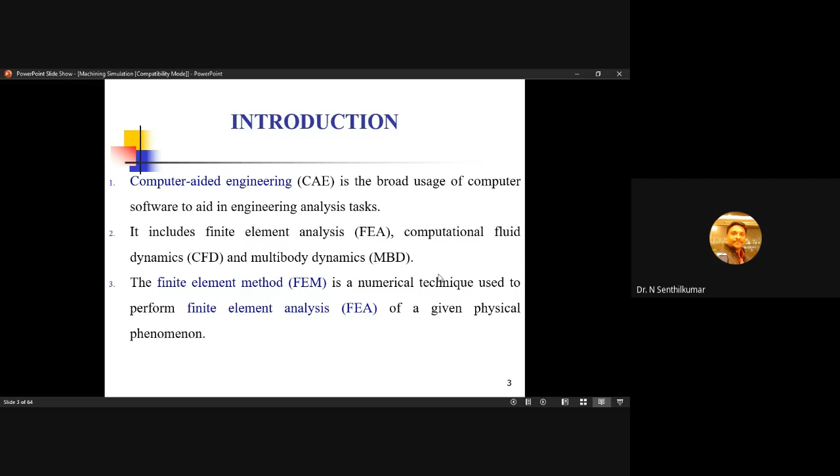Okay. So in finite element analysis, we will be using the finite element methods, in which we are going to discretize the parts into small elements. So the solution for a particular element will be moved towards the solution for the entire domain space. Okay. So in all these FEA, we'll be using partial differential equations.

Because we are going to have FEA in all our studies nowadays, everyone will be aware that the partial differential equation is of that much importance in engineering. That's why there is a separate subject called partial differential equations whenever we go on to a specialization.

So what is meant by modeling and what is meant by simulation? These two are different words. Okay, so a model is nothing but an abstract. You know, if you are going to write a paper, you should write the abstract. That is the essence of a paper. So similarly, the model is only an abstract that is being defined, that is really equivalent to the real conditions.

Right? The real conditions is nothing but we are going to have a product, and that may be having some key properties and characteristics. For example, the material properties, the thermal properties, and also the characteristics, how it is going to perform. Okay, so all that we have to put in a real-time model by using computer systems.

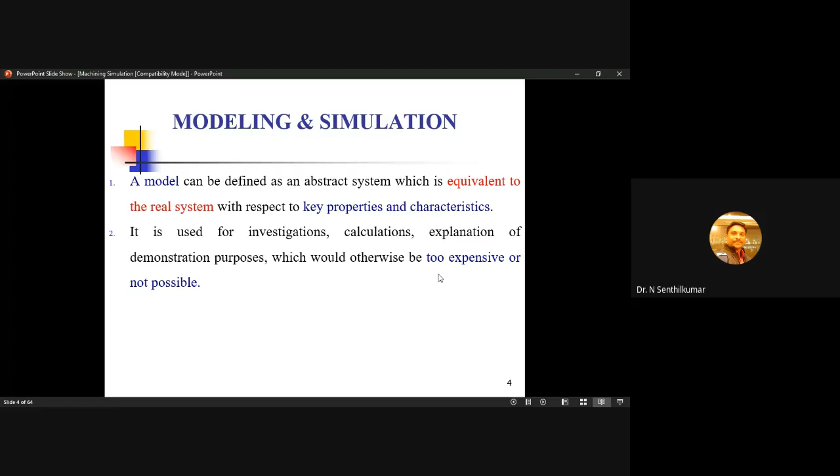If I am going to study these things in realistic conditions, then the expense will be very, very high. And also, in some cases, it is not at all possible. You can see in a turning process, the cutting tool is going to be in contact with the workpiece at a very, very small area. In that place, high shear is going to occur. Will you be able to see that? No, it is not at all possible. So all that we can visualize properly through these simulation studies. So that's why we are going to develop a model.

And also, while developing the model, we are going to provide some general statements, or what is called assumptions. About what type of element we are going to select, whether it is a tetrahedron element, a triangular element, a rectangular element. So likewise, we are going to provide statements about what type of element we are going to take, what kind of structure it is going to have, and how it is going to behave in a real-time system. All these we are going to incorporate into the model.

Okay, so you know the best FEA software is ANSYS. In that also we are going to provide these kinds of statements. For example, whether we are going to carry out the machining simulation in a transient condition or in a steady state condition. We have to determine the values once the machining process has attained the steady state condition. Initially, the steady state conditions will not be attained. So first we have to carry out the simulation in transient conditions, and after some time we convert that into a steady state condition. So two parts will be there: first the transient conditions, and then the steady state condition. So like this, we have to provide the statements, the assumptions, of what we are going to do.

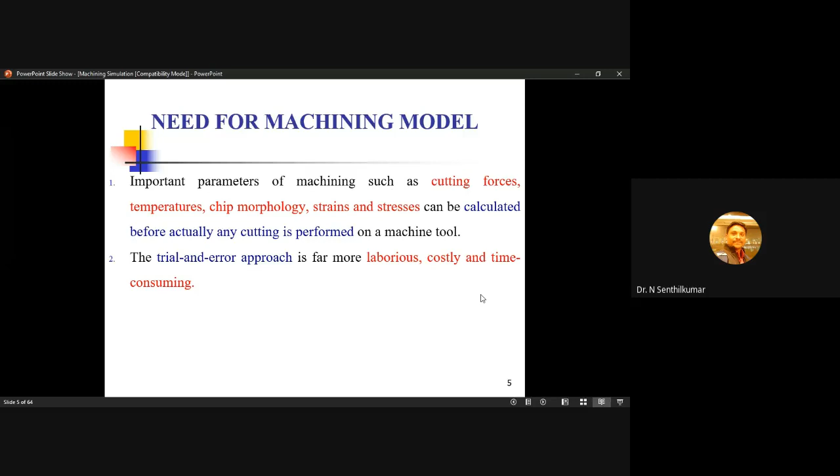That's why in investigational studies, we'll be using different cutting edges for each and every experiment. That's why it is most laborious and also costlier.

Right? So this is the main important thing. With the modeling, that is by using the simulation models, the resources are spared. That is, I am going to prevent the usage of resources: the manpower, the equipment, the electrical power that is going to be used, the cutting tool that is being used, the workpiece material that is going to be used will be spared. And also we are going to obtain an optimum condition.

By using this, we are not going to use anything except the computer, so the cost is also reduced. That's why we are going for these machining models. So what are the benefits that we will be having from the machining model? It drastically reduces the experimental work.

It drastically reduces the experimental work, because if I'm going to do that directly, then I'm not able to reduce the cutting forces and temperatures, because these cutting forces and temperatures will always depend upon the tool material that we are going to use, the workpiece material that we are going to use, and the machining parameters that we are going to select.

If it is a hardened steel, then using an HSS or an uncoated cemented carbide will not fetch you good results. So in those cases, we have to move on to cermet tools or PCD or CBN. Likewise, if I'm going to go for this, then the cutting forces will be really reduced. So this modeling reduces the experimental work.

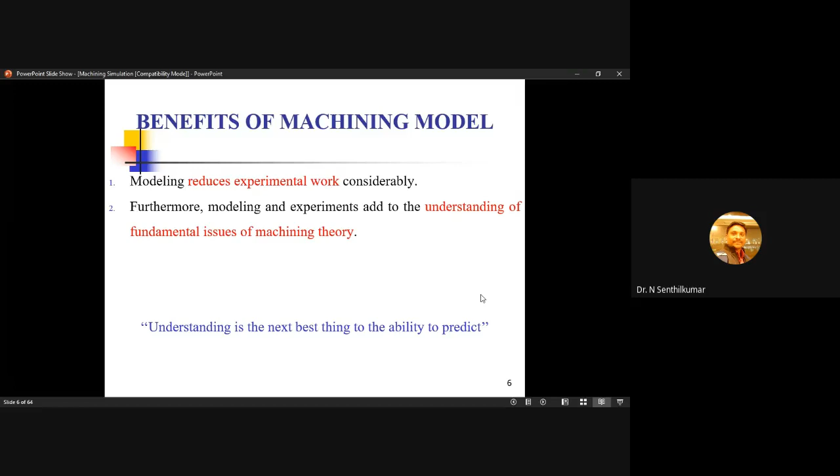So by using the simulation models, it is particularly important, and it is particularly able to help understand the concept in a really good manner, because understanding is the next best thing to the ability to predict. If you understand the basic concepts well, then we are at the edge of predicting things in a really nice manner.

Right. So once we understand the basic concepts, then it acts as a feedback loop for machining research. That is what I was telling in the previous point. Because for research, the understanding of basic concepts is very, very vital, and that is possible with these machining models.

Then, even though it has some advantages, it also has some disadvantages. Sorry, we should not use the word disadvantages, but difficulties. There is no disadvantage of going for any simulation models. It is only the difficulties that we will be facing in the simulation studies. Then what are the difficulties we will be facing? So rather than drawbacks, it is the difficulties.

In doing modeling, if I am going to consider too many variables, then what happens? The complexity of the problem will be higher. What happens when I am going to consider a smaller number of variables? The intention will not be resolved. If I am going to choose a higher number of variables, then the complexity of the problem will be higher. So a trade-off has to be made between these things. That's why the basic understanding of the concept is very, very essential.

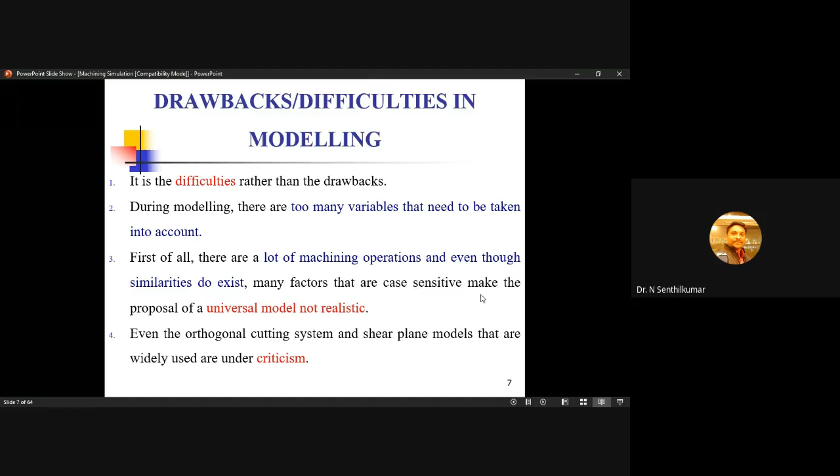So normally we will be going on with the orthogonal cutting process. There are two types of cutting process, oblique and orthogonal. Normally we will be interested in the orthogonal machining process and also shear plane models. But even these two systems are under criticism. Even though we are going to use them, even nowadays they are under criticism. So which is the best model that we are going to find?

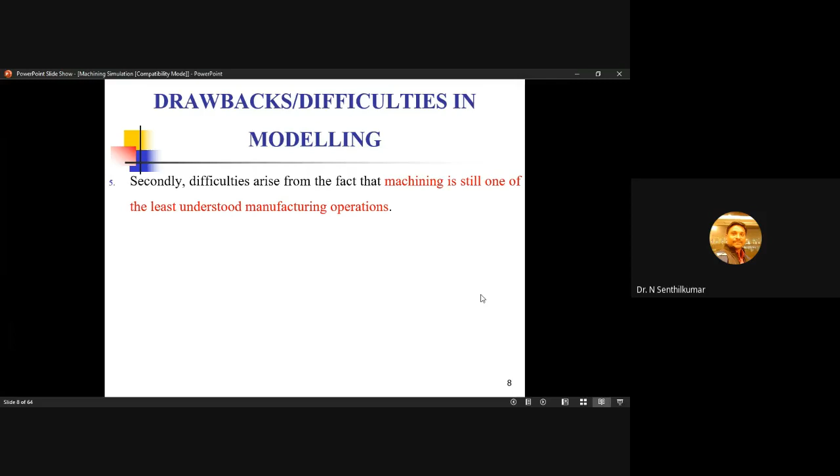Machining is still one of the least understood manufacturing operations. Why? Because how the shearing action takes place, like the Piispanen model we are going to study, is not fully clear. Shearing takes place along the shear zone, like the stack of cards in the Piispanen model. Even though it is least understood, that is one more difficulty.

In turning, the point of the cutting tool touches the workpiece. We have only a small area where the cutting tool is in contact with the workpiece. At that small area, very large strains and stresses act, and only then is the material sheared off. So at that small point, how much stress and strain is going to act is making it very difficult to understand. That is one more difficulty we face.

Then there's the chip forming mechanism. The chip is removed from the workpiece purely through the shearing action of the cutting tool. The chip formation is really complex, and the associated models are also complex. Finally, we can see chip formation models, friction models and so on, which we will study later, because not a single model is universally available.

We have different models, so for your work, we have to select which one is the best suitable. There are different models from which we can select. For our work, which is suitable we have to decide, only by doing the literature review. From studying the previous literature, we can adjust them and understand that.

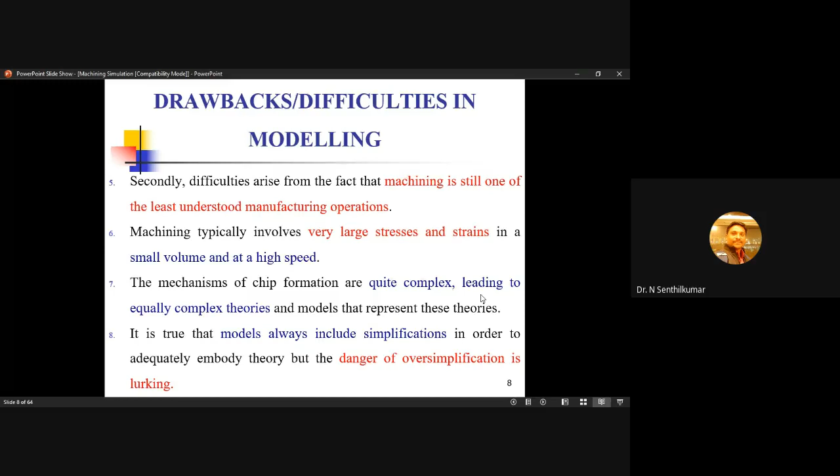If we consider higher assumptions, then the obtained results will be inaccurate. We are not able to predict the real behavior of the system because we have assumed a higher number of conditions. That is one more difficulty we face.

Finally, the properties we provide and the machining parameters we consider make the system more complex. Tool properties include: first, the material; then the rake angle, the relief angle, the nose radius, and the approach angle. That is what we have for tool properties.

Then workpiece: what is the material the workpiece is made up of? Whether it is low carbon steel, high carbon steel, or medium carbon steel, or if it is a composite material, then the complexity will be more. So there's variation in workpieces.

Apart from this, what machining parameters do we consider? Cutting speed, feed rate, depth of cut. We can also consider whether we use cutting fluids or not, whether it is wet machining or dry machining, or MQL minimum quantity lubrication, or cryogenic machining. These parameters increase the complexity of real-time conditions, and we can use these during the simulation process also.

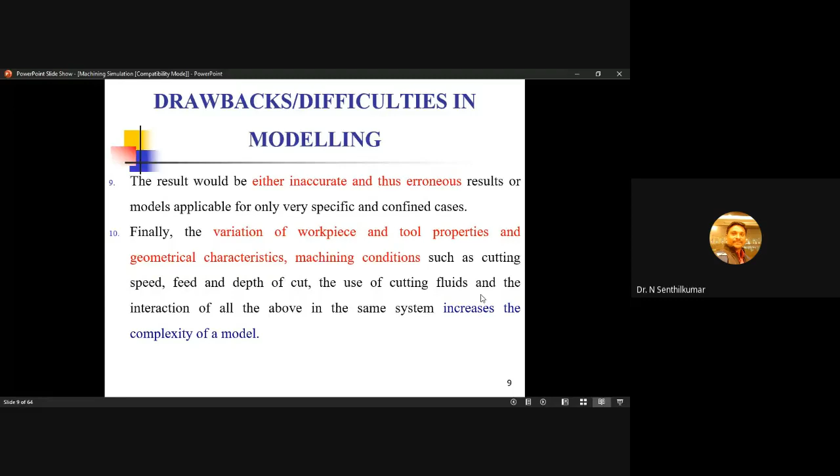Then, how to select a model? The model we develop or select will influence the output responses, so selecting the perfect model for your study is very, very important. What is a model? The workpiece model, the flow stress equation, the friction model, the tool wear model - these are all the models we are speaking about.

So these are the different models. How are we going to select them? Depending upon the model, we can decide whether the output is reliable or not. The selected model will provide a reliable answer to the output. Otherwise, the model we have selected is a pure waste, and the computational time we have waited for is also a waste.

So there are 5 generic categories of modeling techniques available in this case. First is empirical modeling, then analytical modeling, then mechanistic modeling, then numerical modeling, and then artificial intelligence modeling. These are all we are going to have.

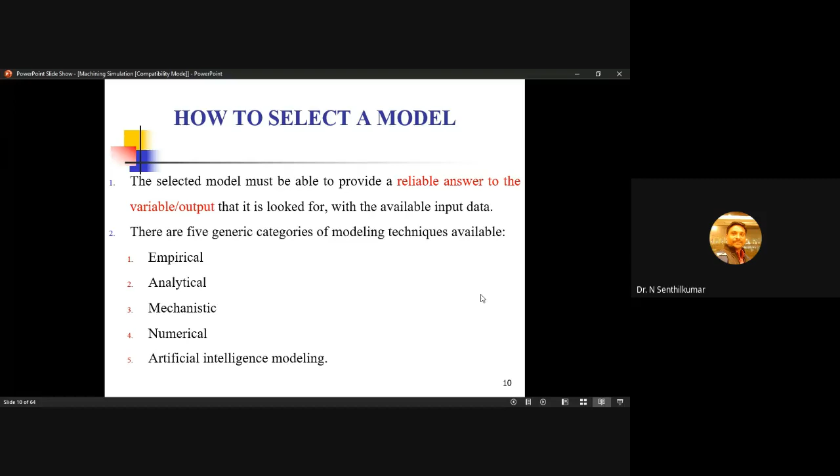Analytical model uses previously developed equations to define the model. The empirical model uses experimental data to build and develop the model. Likewise, different categories have different methods. You all know this very well, so I am skipping this out.

So there are 2 types of models: simple models and complex models. Simple models require a lesser number of input data, whereas complex models require a higher number of input data.

What is the difference between these two? Simple models require less computational time, and complex models require more computational time. The results obtained from the simple model are not that much accurate, but the results from the complex models will be more accurate than those of the simple models.

In the earlier days, in the 1980s or 1975s, while doing simulation studies, tool wear was of utmost importance. So more and more importance was given to tool wear. But nowadays we are going to move on from the tool wear.

Along with tool wear, we are also doing investigations on the cutting forces, the temperatures, and what type of chip is being produced. Also the geometrical accuracies, for example cylindricity, circularity, and the roughness of the machined surface. These are all important things in selecting this model.

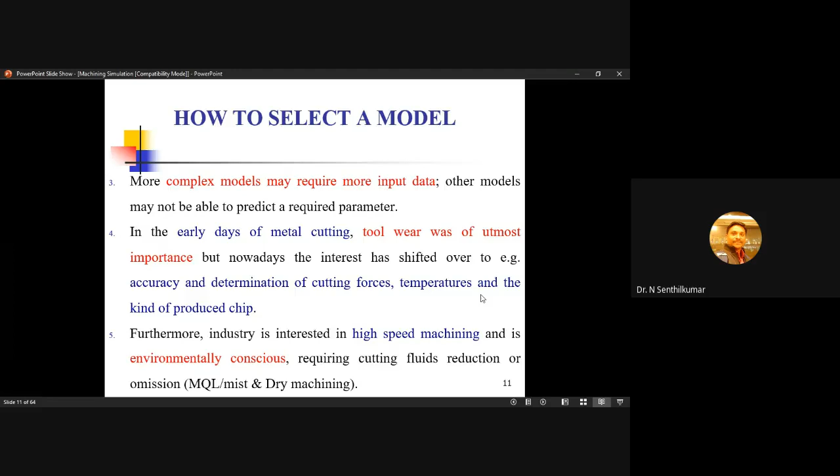So even though you select some specific models for our study, some models will tend to fail. Why will a model fail? That is the first question that arises. A model fails if it doesn't predict accurately—if it doesn't predict the cutting forces accurately, or predict the temperatures accurately.

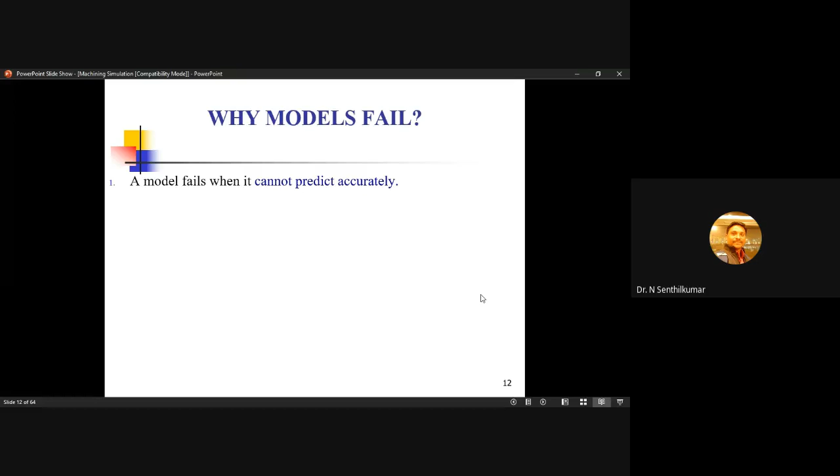This is because the model that we have developed or selected—the flow stress equations, the wear model, or the friction model—if it is not good, then the prediction values will be inaccurate. The models also fail if they are not simple enough.

Previously we discussed the two differences between a simple model and a complex model: a simple model requires less computational time, a complex model requires higher computational time, but complex models are more accurate. However, we require fast results—if a simulation runs for 3 or 4 days, we cannot wait that long. So whatever models we develop should be as simple as possible, so that the computational time will be reduced.

Then, many models fail because of incomplete input data, or omitting some of the critical factors. The most important critical factors in the turning process are cutting speed, feed rate, and depth of cut. If in a study I omit the feed rate, are all the answers obtained correct? No, because we are omitting the critical factor of feed rate. So a model tends to fail if some of the critical input parameters are omitted.

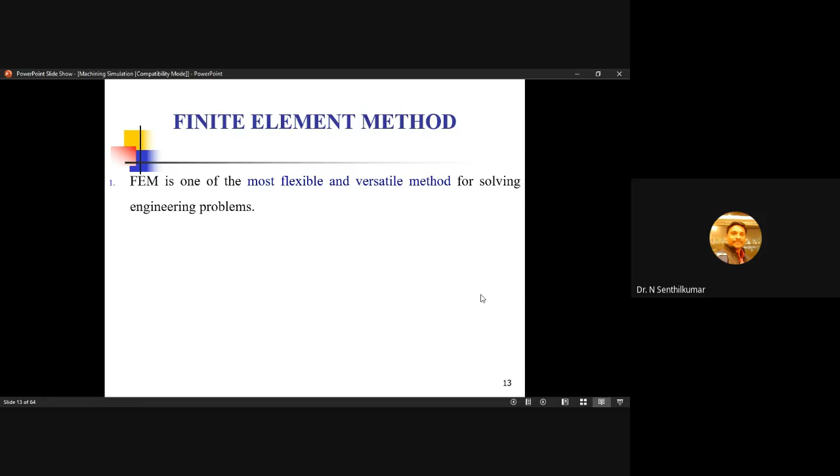Then we move on to the finite element method. It is the most flexible and versatile method. I'll move a little bit fast since everyone knows this concept. The finite element method is made up of small interconnected sub-regions called elements, and the solution is obtained for each element through piecewise approximation, then transferred to the whole domain by integrating.

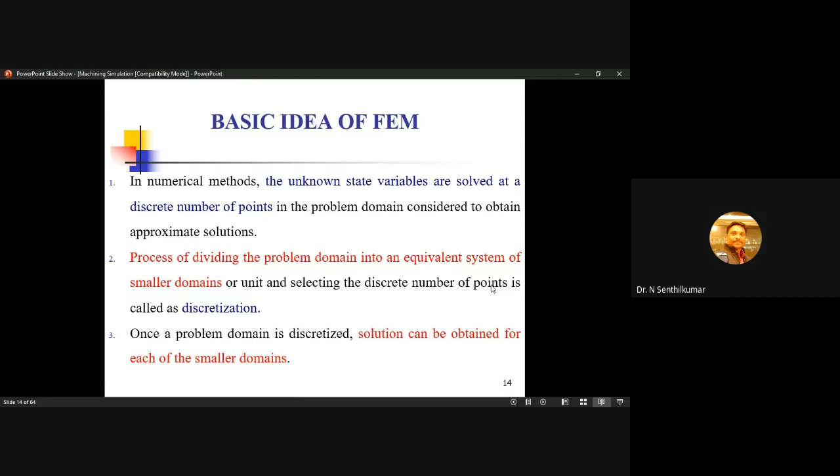...elements. The process of dividing the problem domain into an equivalent system of small domains, so the small elements also represent the solution - that is called discretization. Once the problem domain is discretized, solutions can be obtained for a particular element, and from that element we can get the solution for the entire problem domain. The domain-wise solutions are combined together to obtain the solution for the entire domain.

Elements and nodes put together constitute the mesh. Meshing takes place depending on how it is connected with other elements. The fineness of the mesh increases both the accuracy and the computational time. If the mesh size is higher, the computational time will be less and the accuracy will also be less. If the fineness of the mesh is higher, then there is higher computational time along with more accurate results.

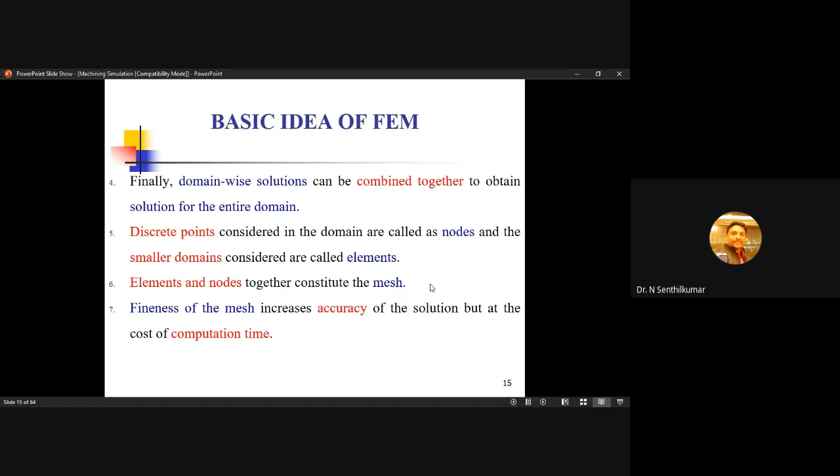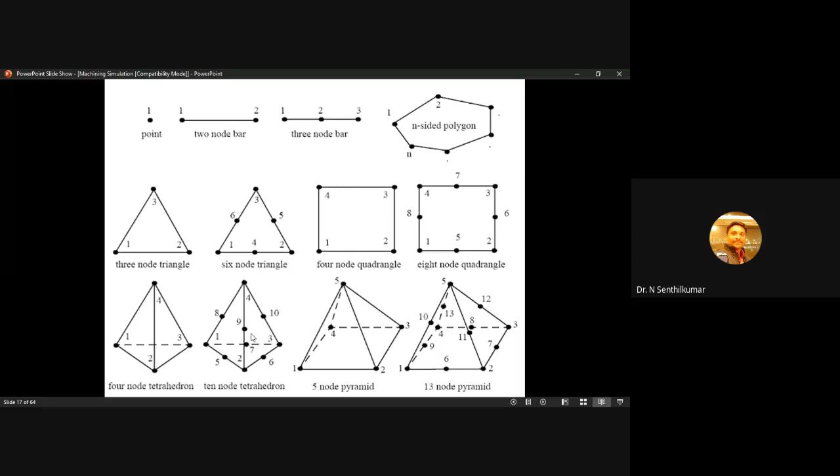Here we can see the elements normally used for 2-dimensional as well as 3-dimensional studies. For 2-dimensional studies we have the triangular element, that is 3-noded or 6-noded, then the quadrangle, and then 8-node quadrangle. Normally for tetrahedron, it depends on the number of nodes - if I increase the nodes, the accuracy level will be higher.

So the computational model using FEM. So now we are entering into the simulation, how we are going to develop it. I'll be moving a little bit fast because the time is very, very less, because the simulation studies will take a minimum of 20 to 30 minutes.

Okay. The first one is modeling, then second is meshing, then specification of material property, and then boundary conditions likewise. So modeling of the geometry, then meshing, then defining the material properties, then boundary conditions, the loading conditions and all we are going to provide.

Right? So the different types of models: the lower and upper bound solutions, then shear plane models, then slip line field models. This we can see in manufacturing technology itself. So what are the different models? What is it going to tell? That we are going to include. Then shear zone models. So these are the 4 models that we are interested in developing a model. Okay.

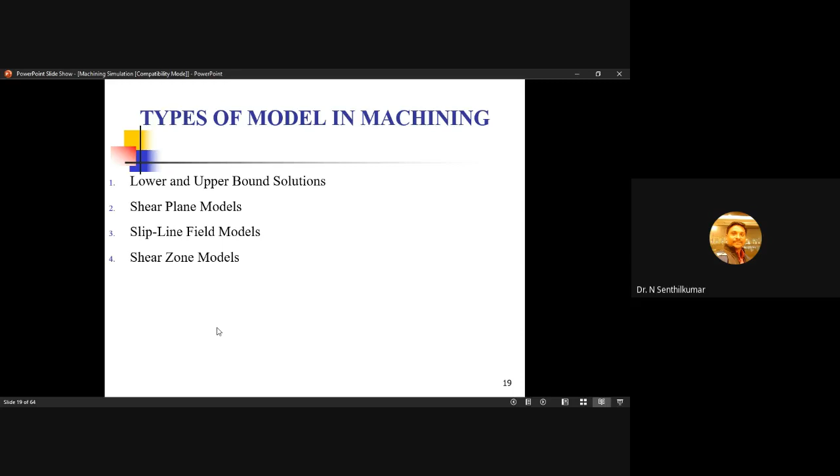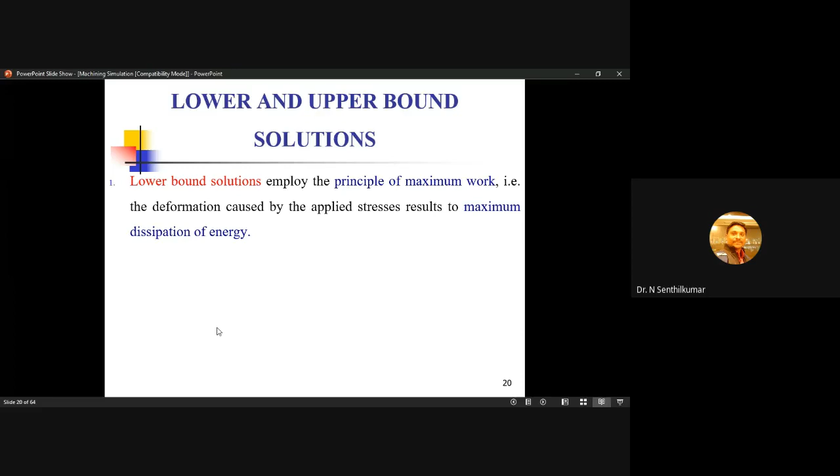So the lower bound solutions employ the principle of maximum work, right? Because once it deforms, it dissipates energy. Deformation is carried out with the dissipation of energy only. Energy can neither be created nor destroyed, but energy gained is equal to energy lost. So the dissipation of energy is subsequent to the next elements. Okay. So this I will move through faster.

So you can see the shear plane model is provided by Ernst and Merchant. In the shear plane model, we are going to have a Piispanen card model, that is a stack of cards, like playing cards. So layer by layer, the metal will be removed along the shear plane, right? These are the things being assumed. The chip is straight. Actually, the chip is not straight, it is curled. But we are going to make it a simple model, so we assume the chip is straight.

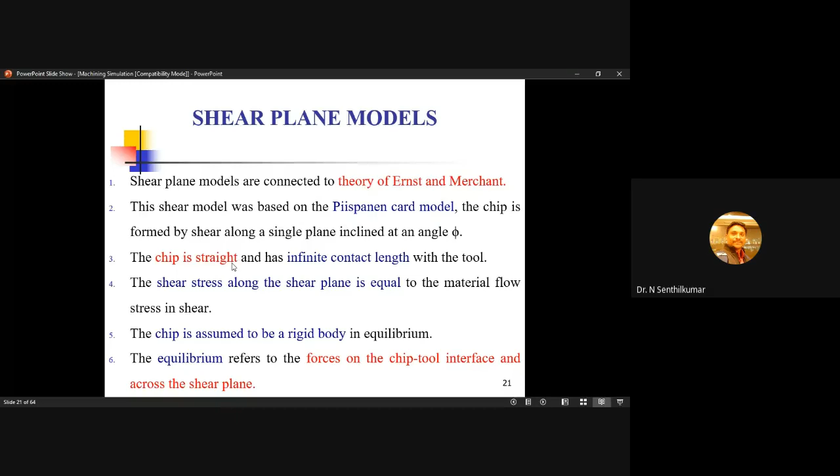And also the chip is assumed to be a rigid body. A rigid body doesn't deform. But that is not the case in a realistic model. Okay. So the equilibrium refers to the forces on the tool-chip interface and across the shear plane. These are some of the assumptions we make in the shear plane models. Then we move on to the slip line field models. Right.

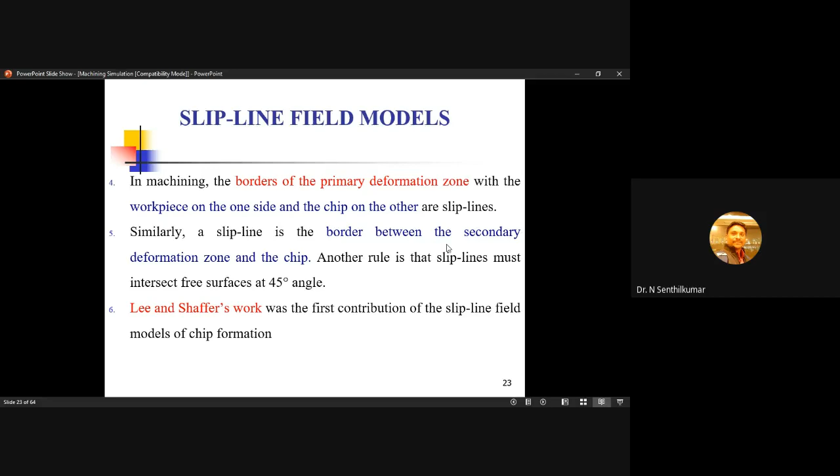So we have two types of deformation zones: the primary deformation zone and the secondary deformation zone. That we will visualize later on. Okay. These slip lines intersect the free surfaces at a 45-degree angle. Lee and Shaffer's work is purely based on slip line fields. So Ernst and Merchant is for shear plane; for slip line, we deal with Lee and Shaffer. Okay.

Then shear zone models. The shear zone model is better than the previous models, that is the shear plane model and the slip line models, because it considers all the features that were neglected or omitted in the previous models. In most of the models, we assume that shear stress on the shear plane is uniform. Actually, it is not. The stresses at the shear plane are not uniform. They vary.

And also we consider that there is no strain hardening. Actually, in all machining processes there will be a little amount of strain hardening. Now there are many excellent papers that predict the strain hardening effect during machining and formability. Right? So the friction among the interfaces is characterized by a friction factor or friction coefficient, mu. So mu is equal to F by N. That also we consider in these shear zone models.

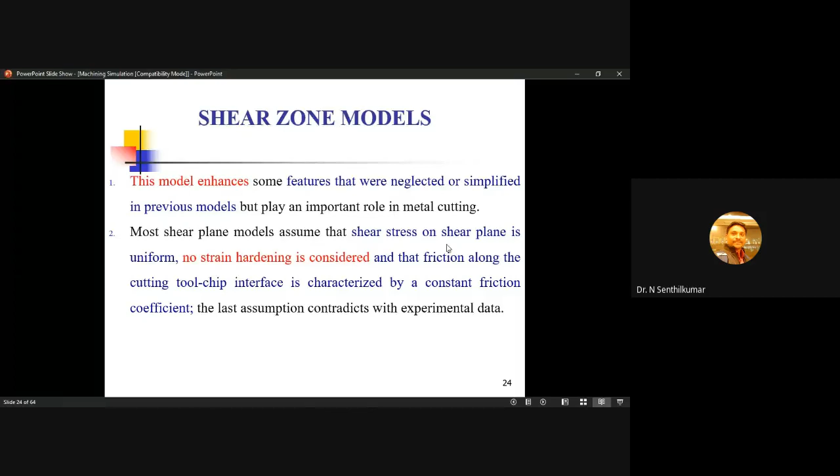But this friction coefficient, the strain hardening, is not being considered in the shear line, shear plane and slip line models. So that's why we are going to consider these shear zone models. Okay. So shear zone models are associated with Oxley.

So I will tell you how to select these types of models while doing the simulation. You can see particularly how this is being selected. You can just select that. So whatever models we require, we can select. Okay, this is all very general.

So for what purpose is this finite element analysis in manufacturing processes being done? The first reason is to validate the results, to determine the performance and effectiveness of the system. So how effective the system is, that we are going to see. Then to identify the optimum conditions, that is, what cutting speed, what feed rate, what depth of cut produces lesser cutting forces and lesser interface temperatures.

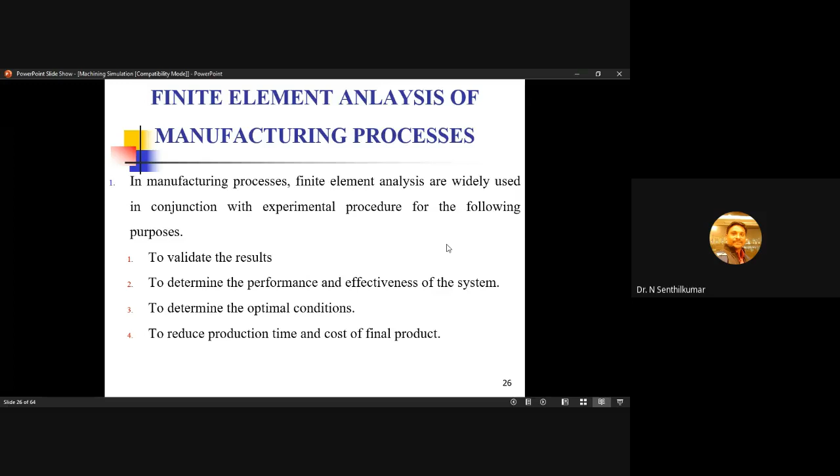Likewise, we are going to decide, and also to reduce the production time and cost of the final product, because most of the simulation studies will assist us in selecting particular input values. So by this, we are going to reduce the manufacturing lead time.

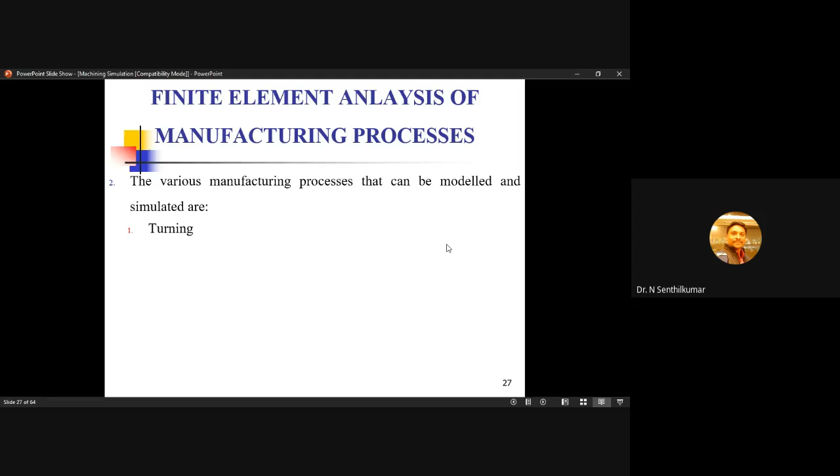So various machining and manufacturing processes that can be modeled are turning, drilling, milling, forming, fluid flows, heat transfer, rolling. These are some of the manufacturing processes that can be simulated. Friction drilling can also be done using software, by using a blunt tool. Okay.

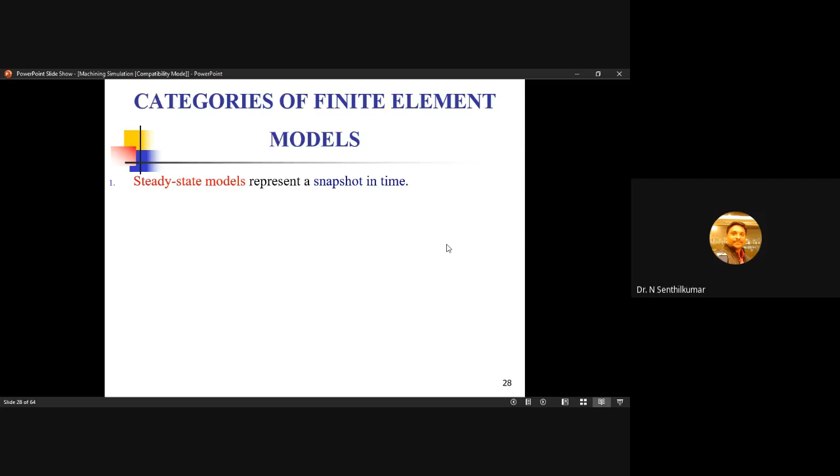So, categories of finite element models. In the first slide itself, I told you there will be two conditions while doing a simulation study. The first one is the transient model, and the second one is the steady state model. The steady state models will be available only after a particular value has been reached. I'll give a small example.

Initially during the machining process, you can see the cutting forces shooting up sharply. After some period of time, it settles down, and that is the steady state condition. The short rising of the cutting forces until it settles is called the transient condition. In transient conditions, the values tend to change with respect to time, whereas in steady state conditions, they don't change. So the steady state models represent a snapshot in time.

The assumed chip shape is used. We will see this in the real-time simulation. Then the shape may be modified. So kindly remember this: the assumed chip shape is used, and the shape may be modified. We are going to do those modifications in our simulation studies.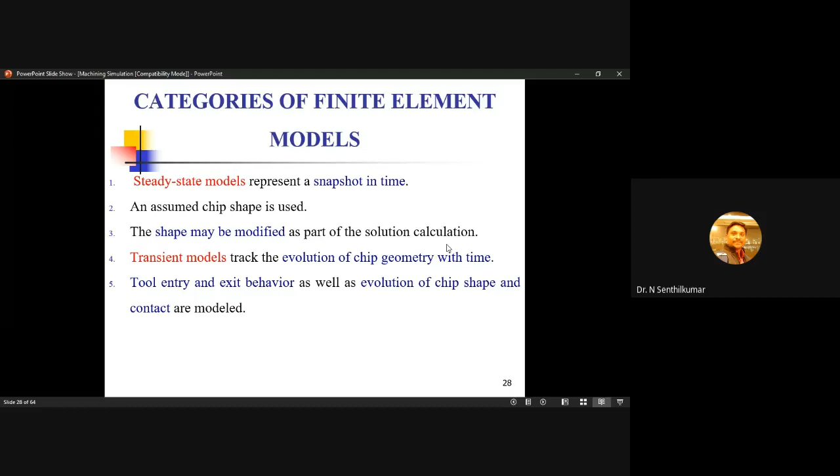Then the transient models. Initially we are going to perform the study using the transient models. It tracks the evolution of chip geometry with respect to time. So with respect to time, everything changes, and that is the transient model. We are going to model the tool entry, the exit behavior, the chip shape, the contact notches, everything. So unsteady chip behavior, because it changes with respect to time.

So in this unsteady chip behavior, we'll be having frequent remeshing. Why does remeshing occur? Because material will be removed. And adaptive remeshing, kindly take note of this word. In ANSYS we will be doing the meshing, and the meshing is adaptive. It automatically remeshes once a new surface is formed, and that is called adaptive remeshing.

Reaching steady state tool temperature is not practical without a special treatment. So what is that special treatment? We are going to remove some material from the chip and give a special shape to the chip. Only then can we convert this transient condition into a steady state condition.

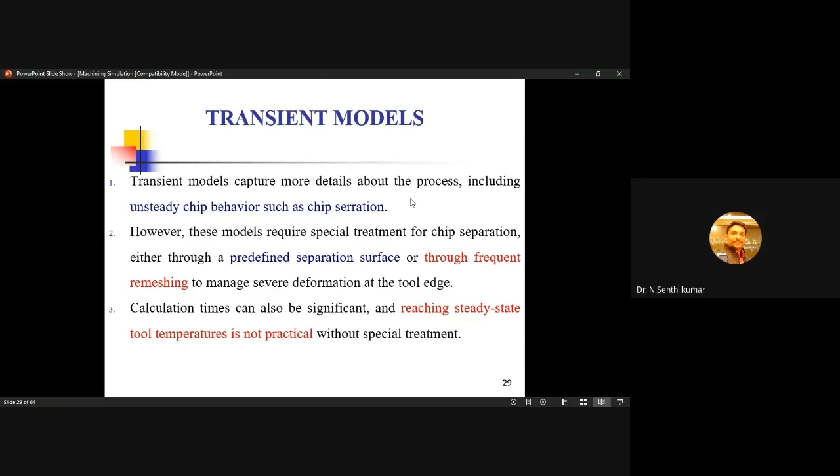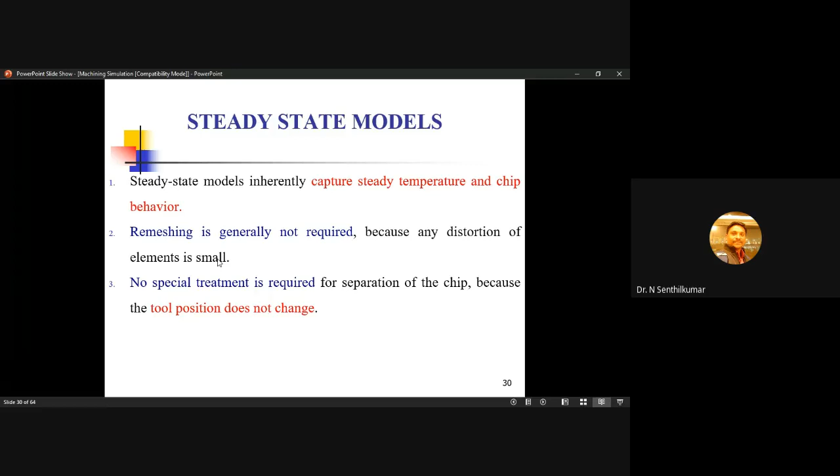So it captures the steady temperature and chip behavior, which doesn't change with respect to time. Remeshing is not required, because once we have attained steady state conditions, even though new surfaces are generated, the same values will be obtained. Frequent remeshing is not applied because the distortion of elements will be less in this category. No special treatment is required, because the tool position does not change. We'll see all this. Then we come to 2D versus 3D models.

So the 2D models are appropriate for orthogonal cutting simulations. Okay, so it can use only orthogonal. So while comparing with the 3D models, the 2D models' computational time will be very, very less, but the accuracy of the results will also be less. For example, this 2D simulation can be done within 1 hour, whereas the 3D simulations can take 8 to 9 hours maximum, with a moderate meshing and element size. If I'm going with a further fine meshing, then it will be nearing 12 to 13 hours.

So the 2D models are appropriate for studies to study the fundamental behavior of the machining process. If I want to study the fundamental behavior, then I can go with the 2D models. So how the residual stresses and how the microstructural changes are going to take place, all that we can visualize clearly using these 2D models.

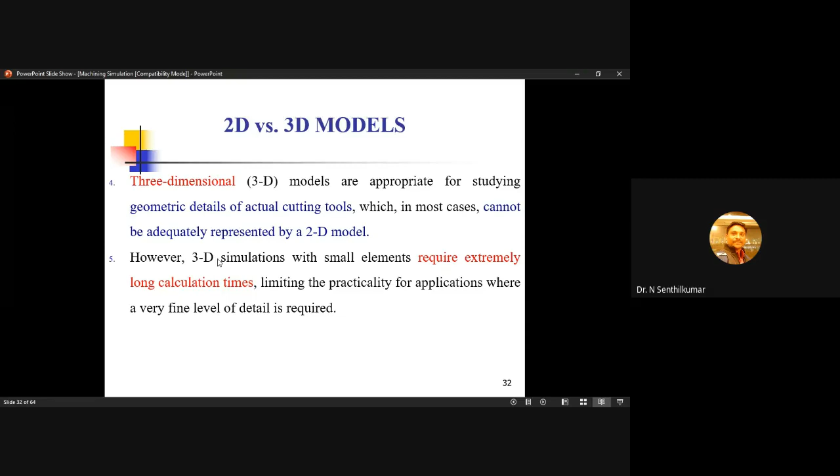So the 3D models are appropriate for studying the geometrical details of actual cutting tools. So how this cutting tool is going to wear, what type of wear is there, all that we can easily visualize by using these 3D models, right? Because tool wear cannot be easily seen in the 2D models. Only in 3D models can it be easily visualized. But these 3D models require extremely high calculation times. So that is the most important drawback of going with these 3D models.

So historic developments I will skip, because it's already time. It's already 10:50. I will rush a little bit.

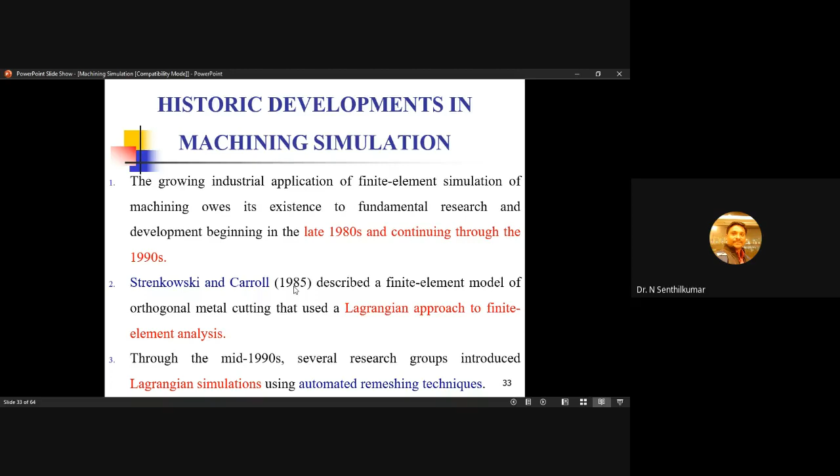So it all started in the 1980s. Strenkowski and Carroll defined the Lagrangian approach in the year 1985. So simulation studies have been done for only about 35 years. Then automated remeshing techniques were introduced along with the Lagrangian simulations. Then Sekhon and Chenot used automated remeshing with the code Forge 2, developed at a French research institute. Then Camacho, Marusich and Ortiz introduced continuous remeshing techniques in 1993. So most of the developments in simulation studies have taken place after the 1990s, for high-speed machining.

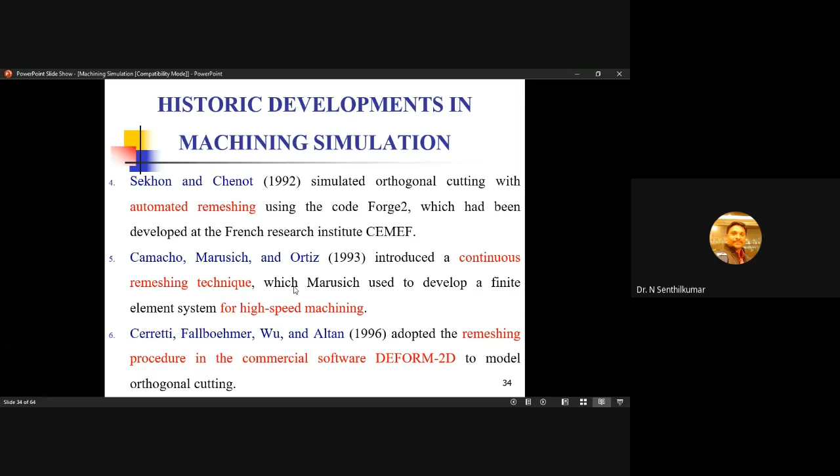So the first DEFORM 2D model was introduced in the year 1996. Cerretti, Fallboehmer, Wu, and Altan adopted the remeshing procedure in the commercial software DEFORM 2D. DEFORM 3D is also available; these two come in the same package. Then in 1997 we have the Eulerian model. Then 2D simulations, then 3D. So 3D was introduced in the year 2000; before that it was only two-dimensional. In 2000 the turning process in 3D was first carried out using commercial software with adaptive remeshing. So this I will skip. Right. This is very, very important.

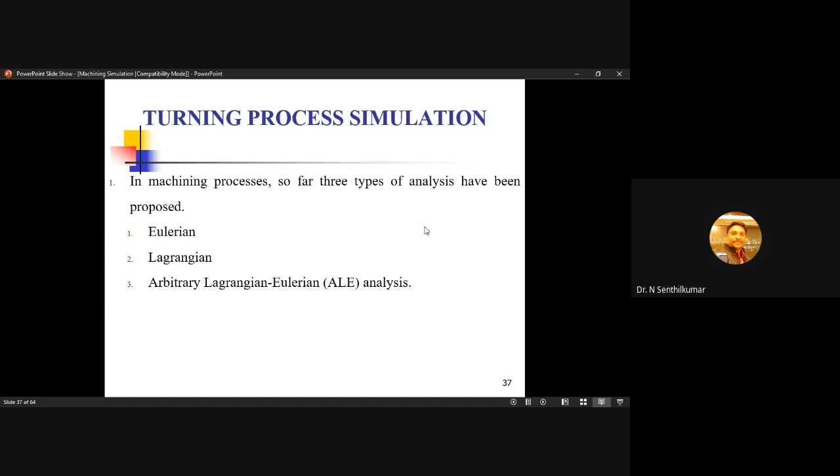So in the machining process, normally we consider Eulerian, Lagrangian, and arbitrary Lagrangian Eulerian. Considering the advantages of both Eulerian and Lagrangian, we are going to use ALE analysis. And normally we go with ALE only, because that is the best approach we have nowadays. Okay, so this I will skip because of the time limitations.

The meshing. So the initial mesh is very, very significant for the results. There are two types of meshes available. One is fine mesh and the other one is coarse mesh. Coarse mesh is used for testing, whereas a finer mesh is used for checking the model. So coarse mesh for testing, and for validation a finer mesh will be used, right?

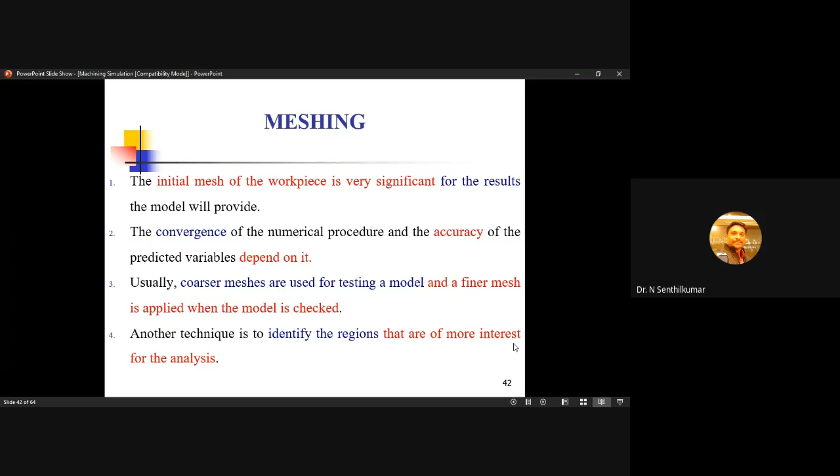And the most important thing is we are able to identify regions that are more important during the simulation studies. So which area is very, very important in a turning process? The place where the cutting tool and the workpiece meet. In those places, we are going to have a finer mesh. As we move away, we are going to have a coarse mesh. That is one of the beauties of these commercial softwares. At the point of contact, we have finer mesh; once we move away from that, we have coarser meshes. Okay.

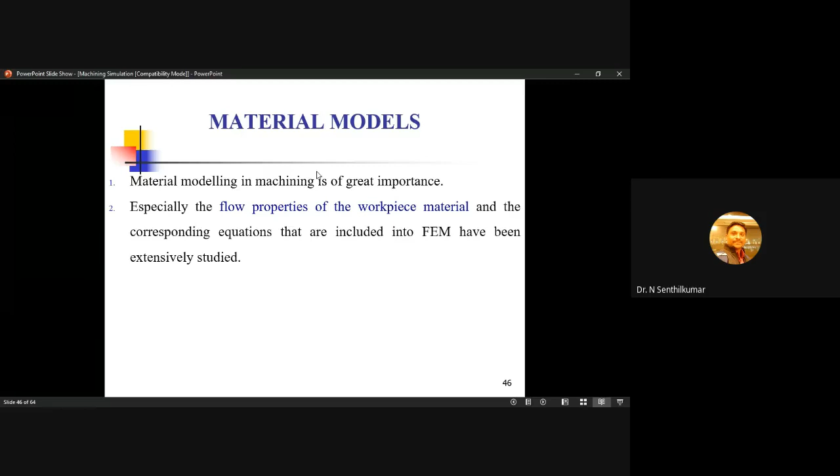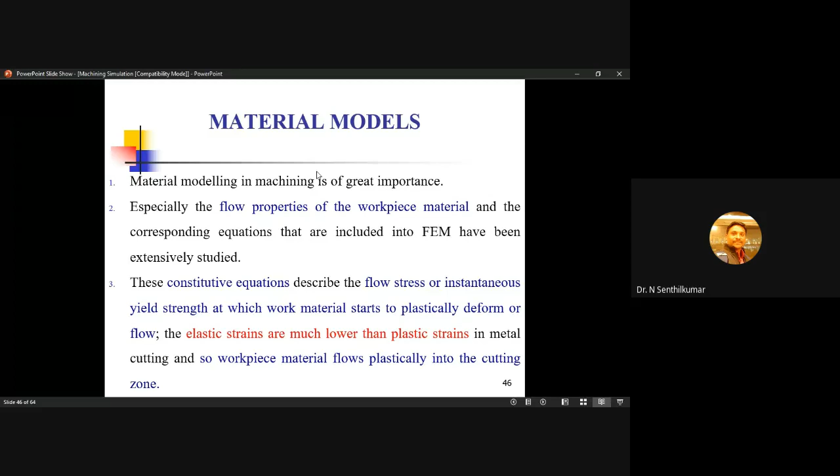So material model. The material model is purely based on the flow stress equations, how the material flows, the flow properties of the workpiece material. The flow is nothing but how it is going to behave in elastic and in plastic conditions. It all depends on the yield strength of the material. So that flow stress is very, very important.

Based on that, we are going to have elastic plastic, elastic viscoplastic, rigid plastic, rigid viscoplastic, like this. We have two different zones, primary zone and the secondary zone. In the primary zone, the temperature will be around 150 to 250 degrees centigrade, and in the secondary deformation zone, the temperature will be around 800 to 1200 degrees centigrade. And also the strains will be very high strains.

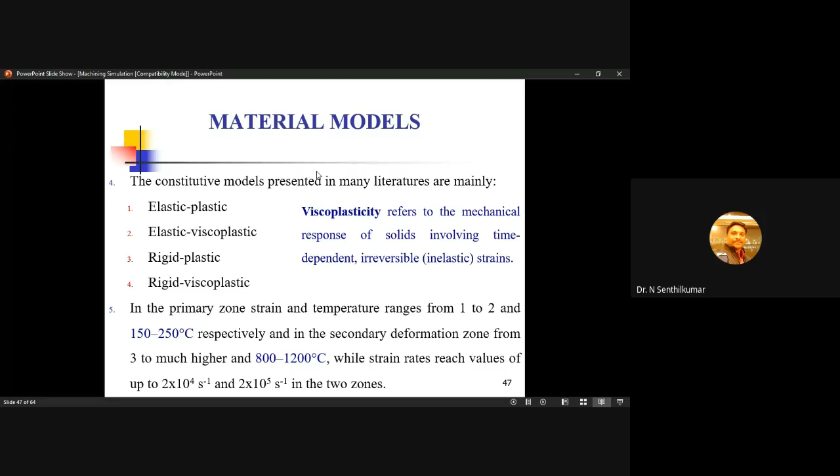So what is viscoplastic? The mechanical response of solids that involves time-dependent irreversible strains, that is called as viscoplastic. These are the different models you can select during the simulation: Usui model, Oxley model, Johnson-Cook model, Zerilli-Armstrong model. Normally we will be selecting the Oxley model and Johnson-Cook model. I will tell you how to select that.

Then flow stress measurement. How are we going to measure the flow stress? Only from the tensile test we can define this flow stress, but that is also an approximate one. Why? Because larger strains are going to occur, and that is not possible with the real-time tensile test. The traditional tensile test involves measurement of the force.

In normal conditions of machining, the strain rates at the primary zone are going to be 10 power 5 or 10 power 6. But in the real-time tensile or compression test, we are going to have only 10 power 2. Where is 10 power 5 and where is 10 power 2? If the metal properties are already given in the software, it is easier for you. But if I want to define a new material, then these flow stress equations have to be provided, and these values can be obtained only from the tensile test.

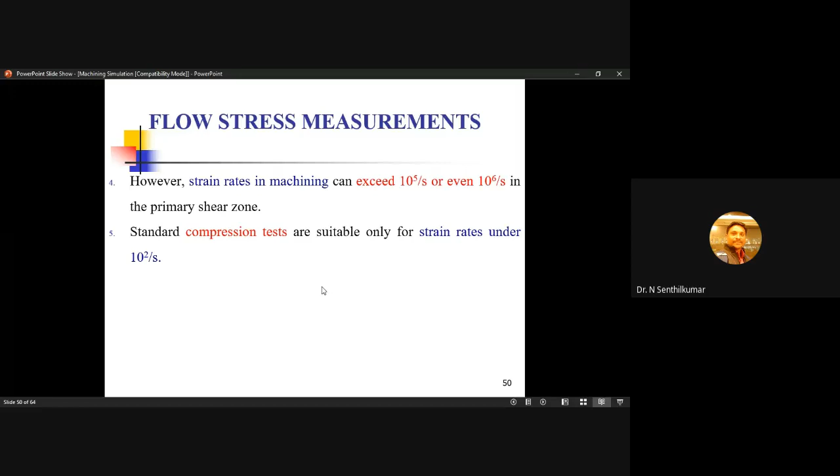The strain rates we obtain from the compression or tensile test will be around 10 power 2, but that's a vast difference. So in those cases, we go with a high-speed tensile or compression test. Even then, instead of 10 power 2, which is 100, we can only increase to 450 per second. 10 power 5 is 1 lakh. So 450 versus 1 lakh, you can see that much difference. That's why the flow stress equation we enter has to suit the real workpiece condition.

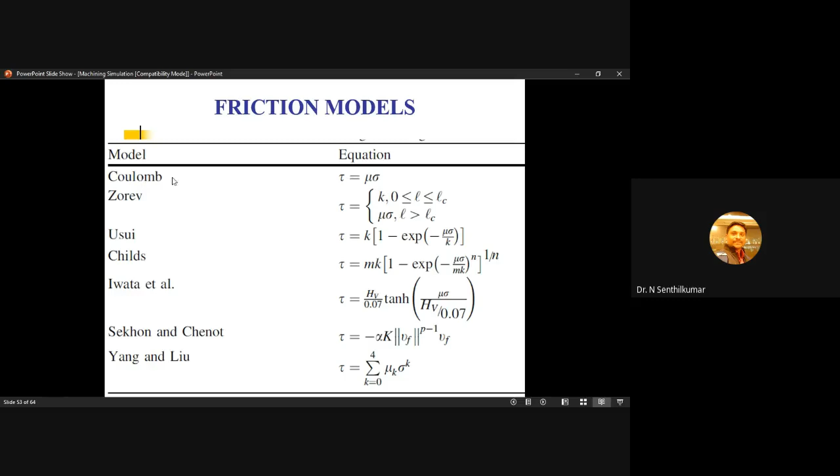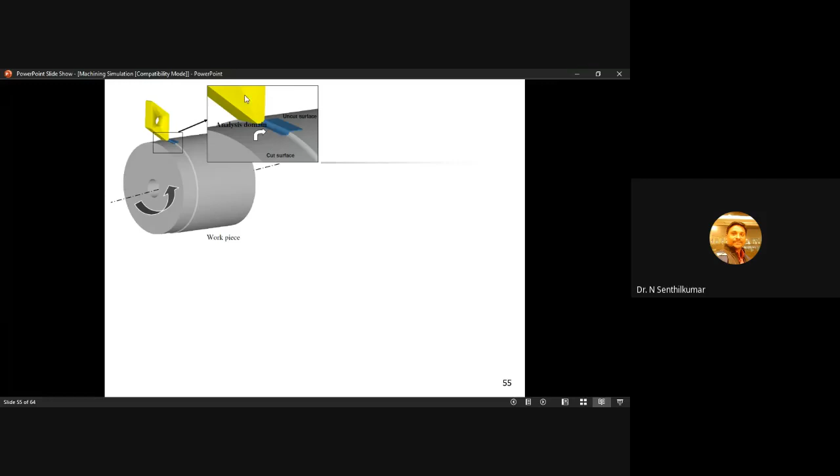So as you all know, the cutting tool will be in contact with the workpiece at a single point. So that point alone we are going to take for our material modeling. So at this place we are going to remove material. So this is for 2D. So we are going to be interested in this. Then we have the 2D simulation.

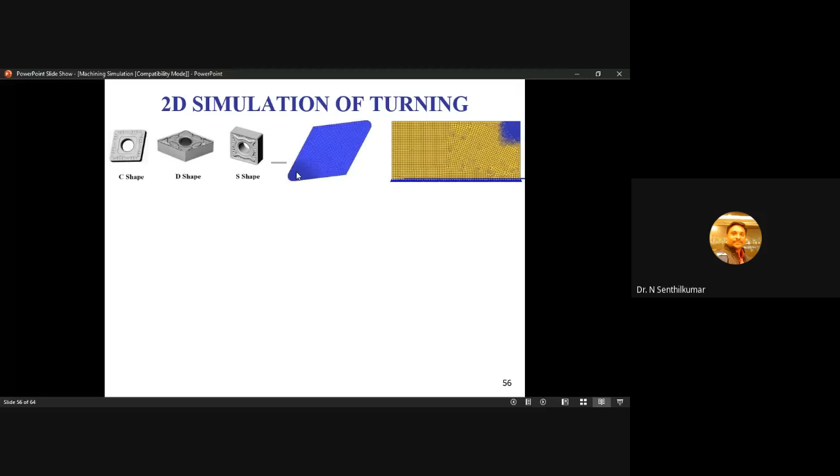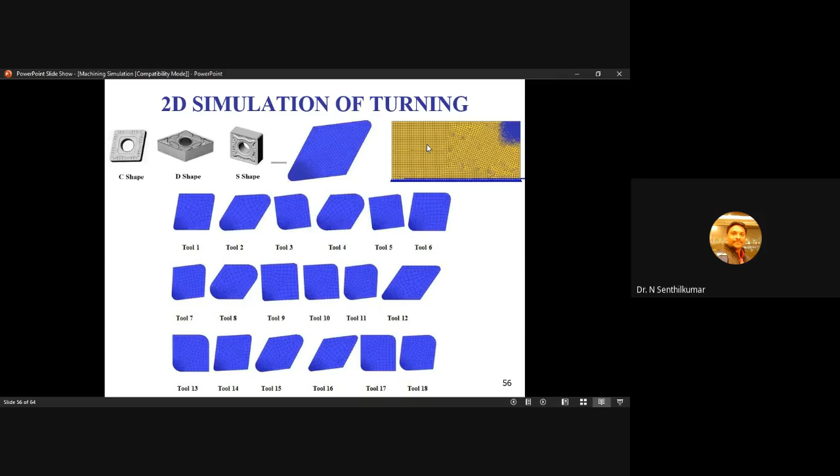We have different shapes. So this is a D shape. So here you can see, this is the place where the cutting tool and the workpiece are going to meet. So this is made finer. Here also you can see this is made finer so that this place and this place will be in contact. Apart from this, we have coarse mesh. So these are the different tools that we have modeled for our studies. And this is the simulation that is being carried out.

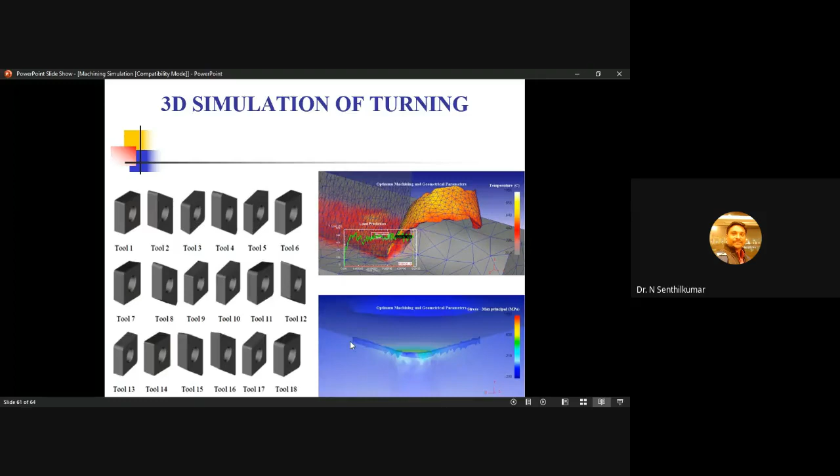So this is how the cutting forces or maximum principal stresses are going to act at the cutting edges and the places that surround and support the cutting edge. From this we can also determine the effect of different cutting speeds on contact temperature, how the contact temperature changes by changing the cutting speed, and we can see the mean stresses. So you can see here, it rises drastically, and after some period of time it is going to stabilize.

If you have any doubts in this, you can ask me now. Or if you don't have any doubts, we will move on to the simulation studies.

Yes, sir. I have a query regarding this material model. Yes, sir, tell me. Normally, for material modeling, we use the Oxley and Johnson-Cook material models, and you are talking about FEM modeling. So which one is better of these two? Which should we choose? Normally, in comparison with Oxley, they will be using only the Johnson-Cook, JC model, sir. Yeah, of course, sir.

Johnson-Cook model is the one we can use, and in most of the research articles also you can see that Johnson-Cook model only, because that provides better results than the Oxley model.

So now I'm asking the difference between this FEM modeling and Johnson-Cook modeling. Which one is better if you can tell me that? It all depends upon the number of factors that we will be considering, sir.

Right, here you can see Oxley, it's a very simple model. But here you can see the parameters, how many parameters it considers - temperatures, strain hardening coefficients, stress values, it all considers that. So that's why when compared to the Oxley model, this Johnson-Cook model is totally different. You can go and find the variations.

Actually, Johnson-Cook is the modification of this Oxley model, right? Yes, sir. That's why I'm asking, in between Johnson-Cook and your FEM, which one is better if we do this modeling? Johnson-Cook is better, sir.

Thank you. Any other doubts to be clarified? Sir, this is Gopi Vel. Sir, how to ensure that whether our given meshing is right?

How to verify? So that's why we are told two things. For the first time, if I'm going to do initial studies, then I have to go with the coarse one. For validation, we have to go with the finer mesh. We should have a trade-off, sir.

Because if I'm going to decrease the meshing size, then the computational time will also be higher, but the accuracy of results will be higher. So that is not needed in the initial cases.

Once we can see that this is the cutting speed, feed rate, depth of cut that I'm going to use, then I can use different meshing sizes and I can find out the variation, and the best results can be used.

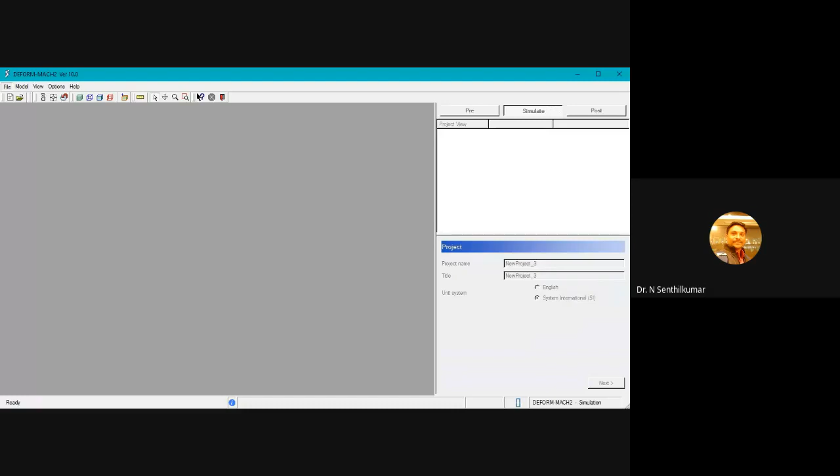New project. So for the new project, I will give it as AMET, the name of the institution which is performing this FDP, AMET. So the title, trial. There are two unit systems. Normally we will use the SI unit, System International, so I am selecting that. Then next.

Then operation 1. Here you can see machining transient. Now there is a drop down menu. Even though I put it here, no drop down is visible, because the drop down will be activated only when a certain amount of chip is produced. So keep it in mind. The transition to steady state is possible only when a certain amount of chip is available during the study. So initially it will be only transient.

Then next, surface speed in meter per minute or rotational speed, you can give both. Rotational speed is n. Surface speed v is equal to pi dn by 60 or pi dn by 1000, depending upon the unit. So I'm going to select this and I can give any values. Also you can use the same value.

So next, the environmental temperature. Whether we are going with hot machining, normal machining, or cryogenic machining, you can change this temperature. Now the ambient temperature is 30 in our country, so I'm going to put it as 30. These work interfaces and all, just keep it as it is.

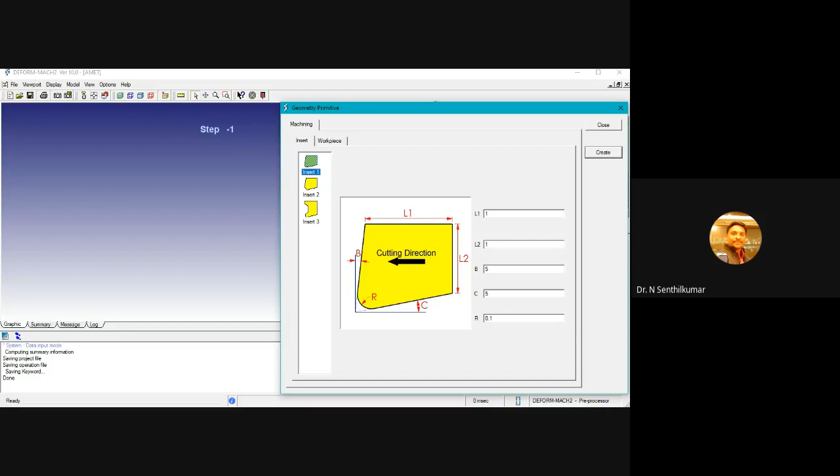So this is the cutting tool. This is a portion. There are 3 different cutting tools available, but I am sticking with the normal carbide. So here I am going to put it as create. Here you can see, a tool has been created.

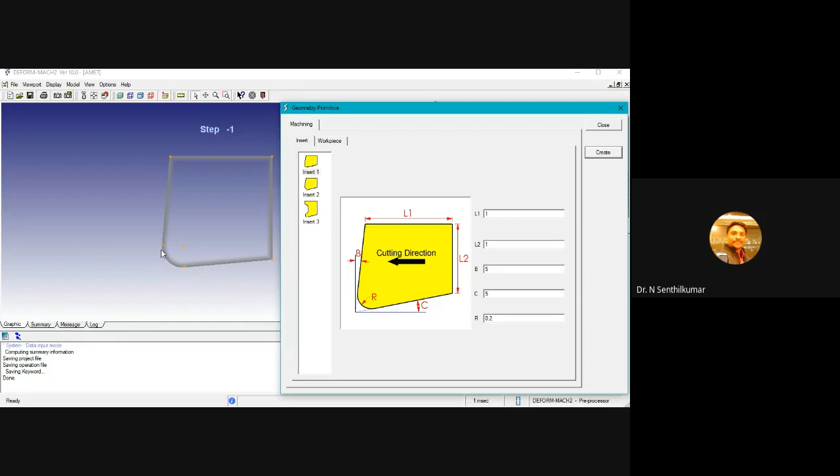Now if I change my values, what happens? Now I am going to change the nose radius to 0.4. You can see it has been changed now. So I am going with 0.2. My nose radius I have set at 0.2. Create, close. So I have defined and developed my material tool model.

Then next, whether we want to provide any coating, because tools may also be coated and their effects can also be studied. In this case, there is no coating. So next.

How much mesh size am I going to provide? Someone asked, some professor, whether we want to go with coarser or finer. In this case, I am going with coarser because I am going to study how it behaves. So I am going with the least thing, 100. Then I am going to generate the mesh.

So here itself you can see the place of contact of the tool with the workpiece. It is being done in a finer mesh, and away from that it is a coarse mesh. Have you seen that? This is the difference in meshing, because in these places I am giving least importance. So here only I am interested.

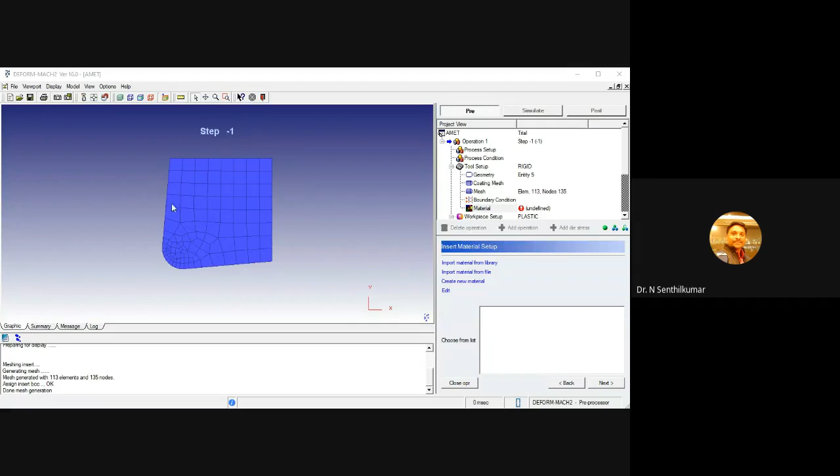And next, then insert a material setup. What is the material for this? I am going to import material. So this is the tool. Then for this I am going to assign the material as tungsten carbide. So my material is tungsten carbide. Tool material is tungsten carbide.

Then next, the workpiece is also a plastic. So the temperature is ambient temperature 30.

Then next, here also I am going to define the primitive geometry. Here also you can see directly we can change it. So now I am going to change it to 2. You can leave it as it is also. So first I will leave it as it is. Here you can see, now I am going to change the value to 2. You can see the change. So whatever is your requirement, you can change.

Then next, what is the size? The number of elements through uncut chip thickness. This is the depth of cut. I am going with less depth of cut, so I can go with a higher or moderate depth of cut of 25. Okay, now I am going to generate the mesh.

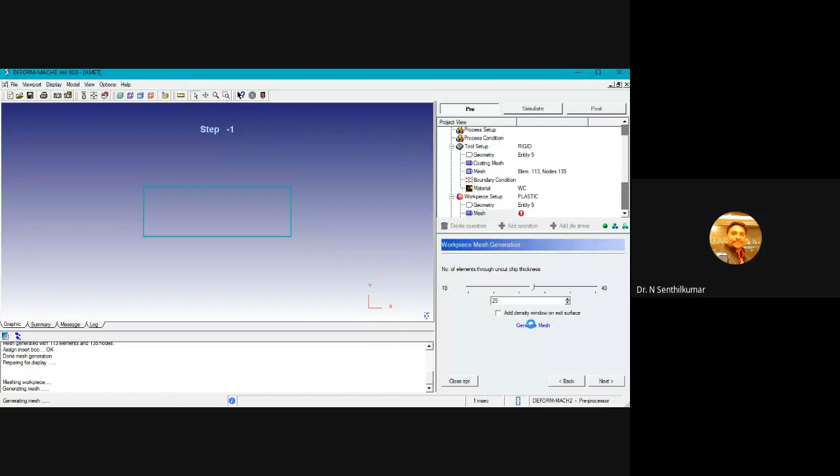So this is the depth of cut, the number of elements through uncut chip thickness. Here you can see a finer mesh is being developed at the point where the cutting tool will be in contact. The remaining places it is going to be bigger.

Next, workpiece material. What is the workpiece material? Now I am going to import, or I can create a new material. Someone has asked the material name. I am going to give a name. Define elastic properties. Yes, next.

So flow stress equations - someone is asking about this. What is the flow stress equation? This is the Oxley, this is the Johnson Cook, whatever it is. Now you can select this. The strain rate, strain from the tensile test we can provide, so that it will take the material property. Okay, now I'm going to cancel this.

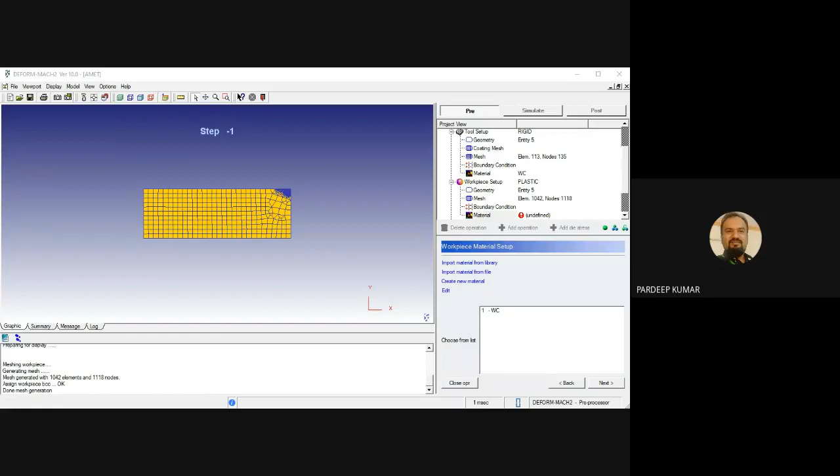Sir, your presentation is not working, I think. For the next model, is it not working? Yes, yes, yeah, the full thing I have to provide, I think so. Wait a second, wait a minute. Now it is popping out, sir. Whether this is visible? Material, yes sir. Window is visible, sir, visible. Yeah, please sir, carry on.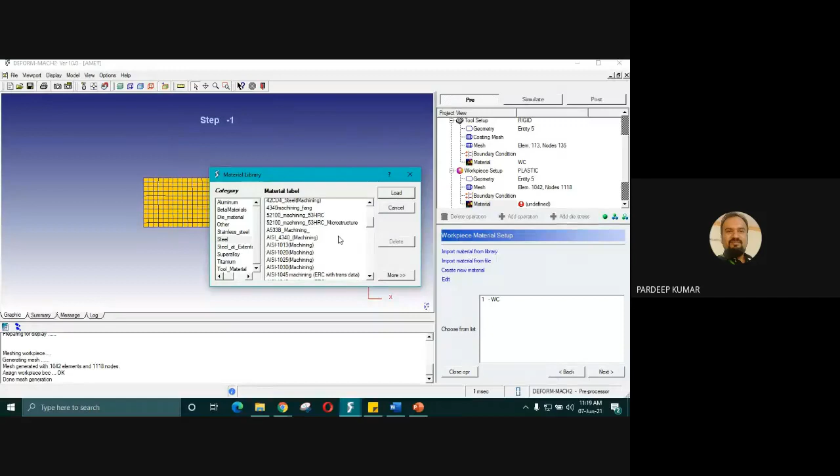But now I am going to stay with the library, so here it is the steel. Sir, may I stop, may I ask something? Yes, yes. Sir, as you say that on the basis of tensile stress results, first we'll have to experimentally do something to find this out, yes sir. Okay, for composite only, because here also we can have composite. I will tell you some composites, sir. Correct sir, correct, please carry on. One second.

Stainless steel, superalloy, titanium, tool materials, aluminum also you can see. Beta materials. So no composites there.

So for this workpiece material, I am going with steel. In steel 1045, you can see the ERC with the trans data. What type of data is this? I have to check with more. You can see the flow stress, the material, austenite material. Look at the strain rate, the temperature, Young's modulus, everything is being given here, and the thermal properties can also be given.

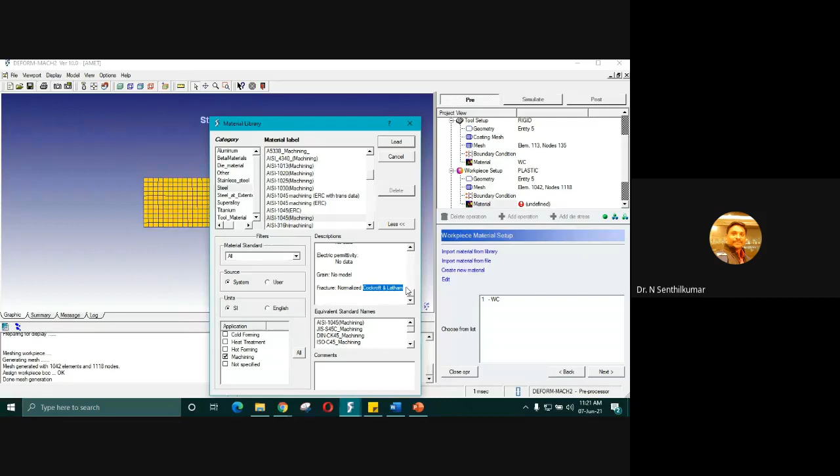I'm going with the next one. Here you can see the J.C., the Johnson Cook model, metal flow model, then 1045 ERC, you can see. 1045, you can see. Fracture model is also there.

Here you can see the Oxley equation. So which model we require, that can be selected. Now I'm going to load this. So the flow stress equation that I have selected is Oxley. If I want to select Johnson Cook, then I have to go with the ERC data. ERC is a company name.

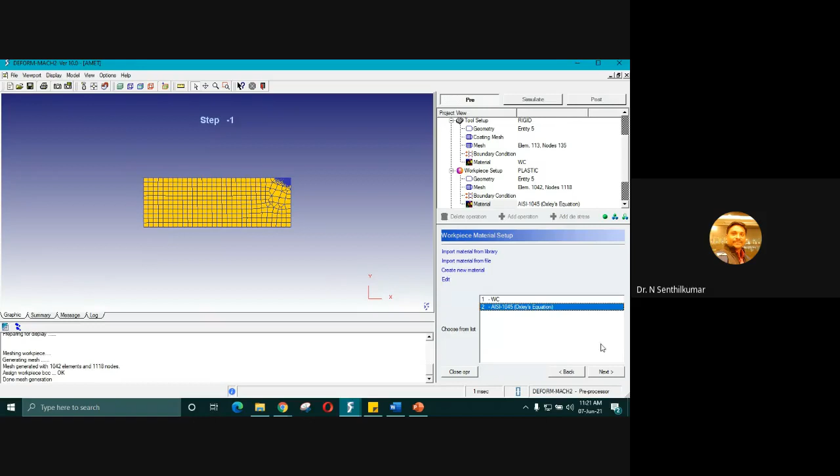Next, then you have to position that, no? So generate default position - by default it will be positioned. The problem will be with the 3D only, 3D only we have to manually position. That is very, very difficult at the initial time. Once you learn it faster, then it is very, very easier.

Then next, so Usui tool-wear model. From literature survey you can study for this material what the parameter values for Usui tool-wear are. This is the equation, so A and B only we have to provide. Next, number of simulation steps, I am going to limit it to 100, and number of increments to save, 5 increments to save. Length of cut, whether I want full or any off, I am going with off.

Next. So status is ready. Check data. Once we check data, you can see on the lower left corner something will be running, and finally the database can be generated in blue. Once this blue is available, then only I have to click generate database, right? Now there is no red. In the left bottom, you can see done writing database. So next, do you want to close current operation?

Yes. Then simulate. There are 3 tabs now: pre-processing, simulation, and post-processing. In simulate, run simulation. The simulation has been submitted. The simulation graphics also you can simultaneously see.

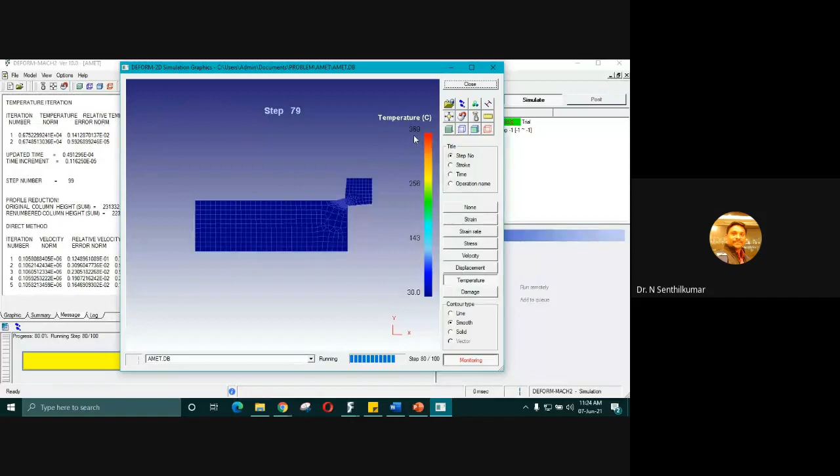You can see step number 57, the temperature. What is the temperature here now? Is it visible? The temperature is 261. You can see 57 steps was completed. 80 steps completed. So what is my temperature here? 369.

Clear? Right, now the simulation has stopped. Why has it been stopped? Simulation is completed and stopped at the user specified time step. I have provided only 100 steps, so it has stopped. Okay, now consider this one.

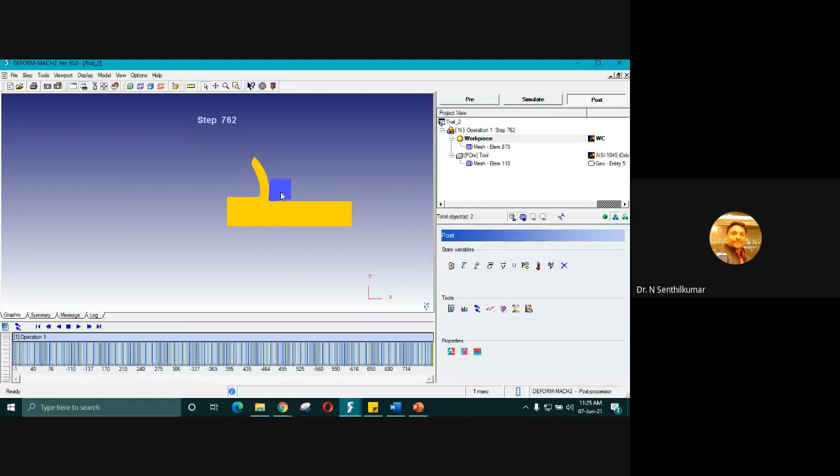I have done some previous study and now I am going to load that, because it will take some time. I don't want to take your valuable time. So this is the case. So at the final you have seen that. Here there is a problem because I have changed the material. Instead of tool material, I have given it as a workpiece material, so temperature will not change.

Here, the state variables, you can see what is the temperature, then what is the deformation. So this is the temperature and this is the deformation, that what you have studied.

Okay, this is the case. Now we have completed the transient conditions. We should not take the values. So kindly accept, we should not take the values. Then what we have to do? Once again I have to go back to pre. I have to select some values before. So totally it is going to be 750, I think so.

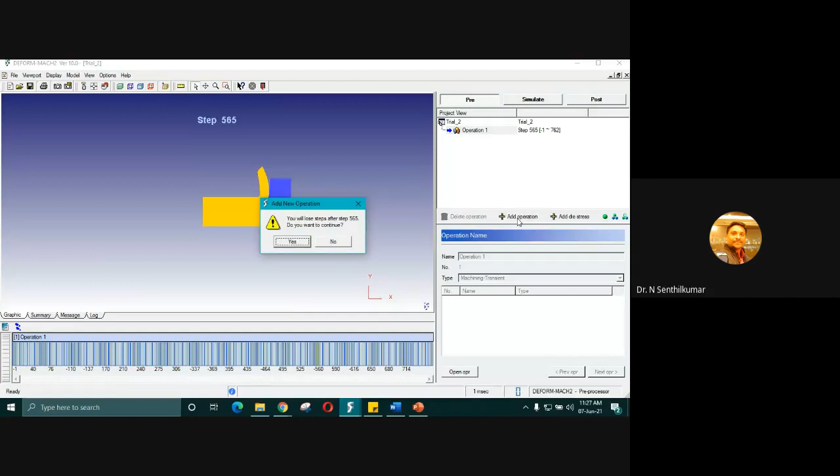That is, once a pre-quantity of a chip is being produced, this will be converted into steady state. Now I am going to do this machining in steady state. Open the operation. Okay, now it is in the steady state. Next, you can see the tool has gone. Why? Because previously I have told, for steady state condition, the chip shape has to be changed. Some modifications have to be made.

Now I am going to select this to this. Okay, sorry. So this is the selector. Now from start to end. So these nodes I have selected. Why am I going to select? I am going to remove this so that a free surface is developed. So that's why I'm going to convert the transient into steady state.

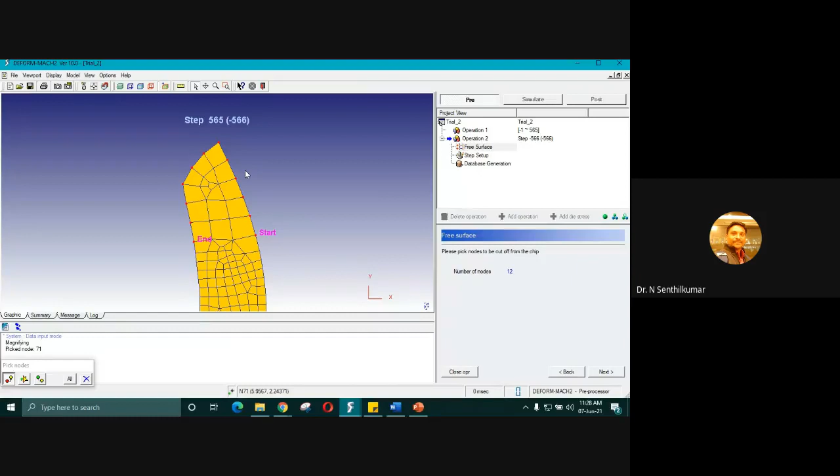You can tell me one important thing. What happens when I select from start? Okay, so I'm going to cancel. Now I'm going to select from start to start. What happens? You can see everything is being selected. Why? Because this is the place where it comes through the tool.

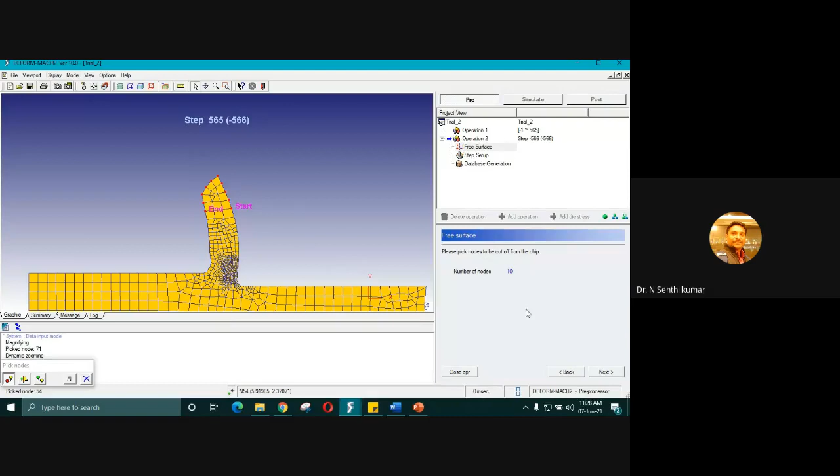So it has to be only from this side. So from shear to here. So this piece I am going to remove. You can see the number of nodes is 10. Next. So that will be removed now. You can see that it is being removed. Now I am going with the 10 simulation steps.

Next. Check database. On the left side you can see database can be generated. Generate database. Done writing database. Still now there is no problem at all. Next. Do you want to close the current operation? Yes. Then open the simulation. Now run the simulation in the steady state conditions until the steady state is reached. There will be some problems.

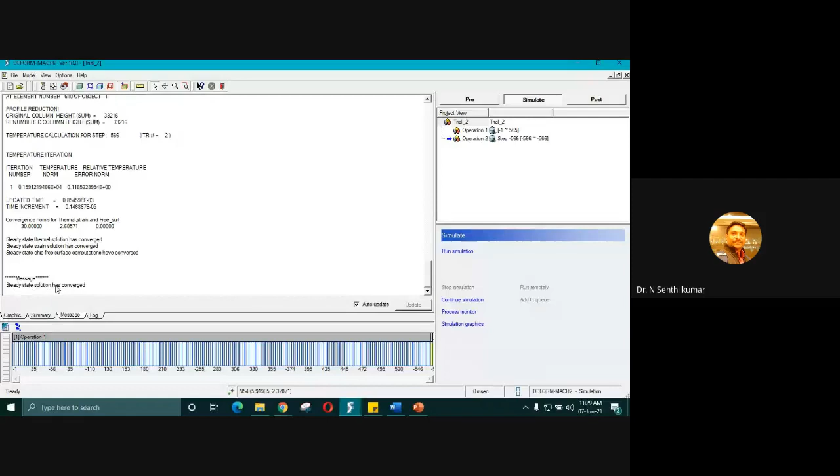Here you can see steady state solution has converged. Within one step, the steady state has been converged. Then post. Now look into the temperatures. Because as I previously told, because I interchanged the material, the temperature is not coming. Okay.

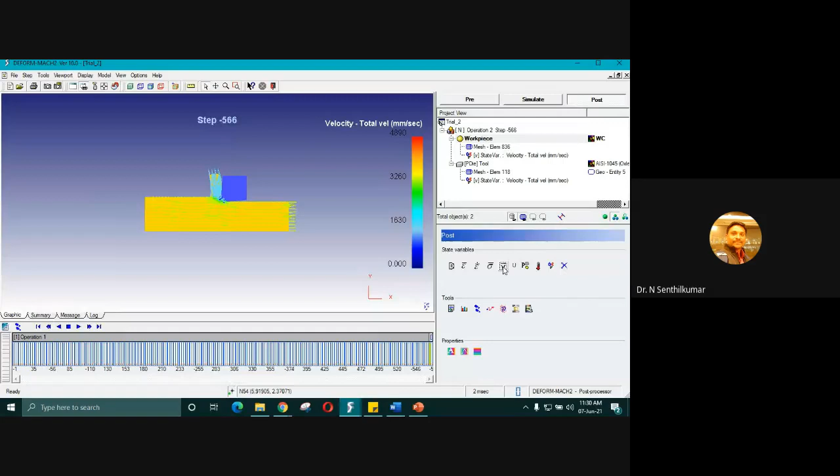This is the temperature. This is the pressure, you can see. So I can go with the local or whatever it is. Then this is the displacement, the velocity, this is the effective stress, effective strain rate, effective strain, damage, whatever it is.

Okay. Now I want to determine the cutting forces. How to do that? So now the steady state has been reached. Now I want to determine the cutting forces. Kindly be with me for the next 5 minutes. I will finish it as early as possible. Now, 1 second, I am going back to pre.

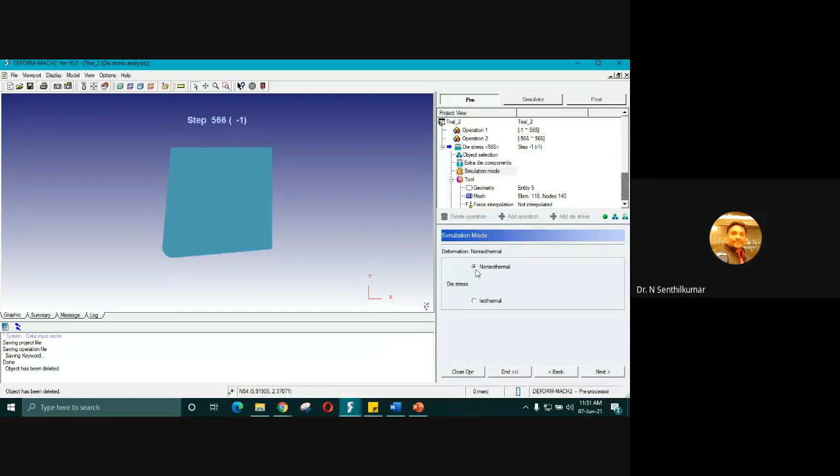Okay. So after steady state is reached, now in the pre-processing you can see add die stress. Add die stress. So die stress. Next the material. Next number of the extra die components. There is no extra die components. Next, die stress is isothermal. Next, next, next. Click just next. Now interpolate forces. That's all. The forces have been interpolated from the workpiece to the die.

In the workpiece, the force in the x direction is 0.0043 newtons, and here also the same case in the die. Fy also the same thing. Okay. So this is how you are going to interpolate the forces. So cutting forces can be interpolated. The interface temperature can be interpolated. The pressure, the strain rates, whatever it is, we can interpolate from these studies. So this is all about this.

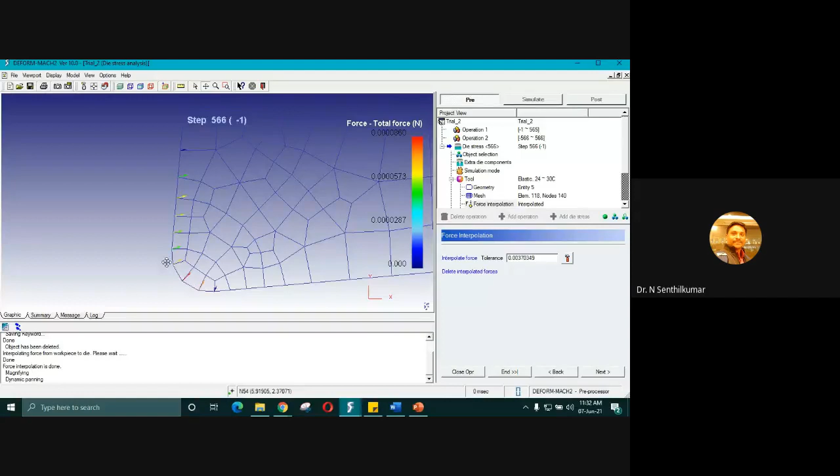So here you can see how the cutting forces are going to act. Red color is higher, no? So higher cutting forces are acting exactly at the contact point. As we move away, the cutting forces are lesser. During that, the chip is going to slide over the rake face, no? Here the cutting force is also higher. But here you can see, this is the place which is not going to be in contact. So the cutting force is less here. So higher, then it reduces. Do you have any doubt in this?

Good morning, sir. I'm Ram Gopal Reddy. Good morning, sir. Tell me, sir.

So, is there any criteria to choose the type of model, sir? So, different models produce different results, sir. First one thing. Okay, that's why for AISI 1045 itself, we have both the Oxley model and Johnson-Cook model. Right? So the behavior of the material, because there are variations in material itself, batch to batch variation, within piece variation, piece to piece variations, we call it. No two materials will be the same.

When you test for hardness, different places will be having different values, no? Similarly, no workpieces will be the same. So it will produce different flow stress equations. So in those cases, you can select whether it is Oxley or Johnson-Cook. But most of the cases in the simulation studies, we are using only the Johnson-Cook model, because it is superior to the Oxley model because of the higher parameters that it is going to consider.

Okay, sir. Sir, one more question. So how to incorporate minimum quantity lubrication in this model, sir? So for that, we have to use the heat transfer coefficient in that model, sir. Third step, you can see. Heat transfer coefficient. So that we have to study and then we have to provide that, sir. In hot machining, we can increase the ambient temperature. For example, if we want to heat the cutting tool or the workpiece to 80 degrees centigrade, then the temperature of the workpiece can be increased to 80.